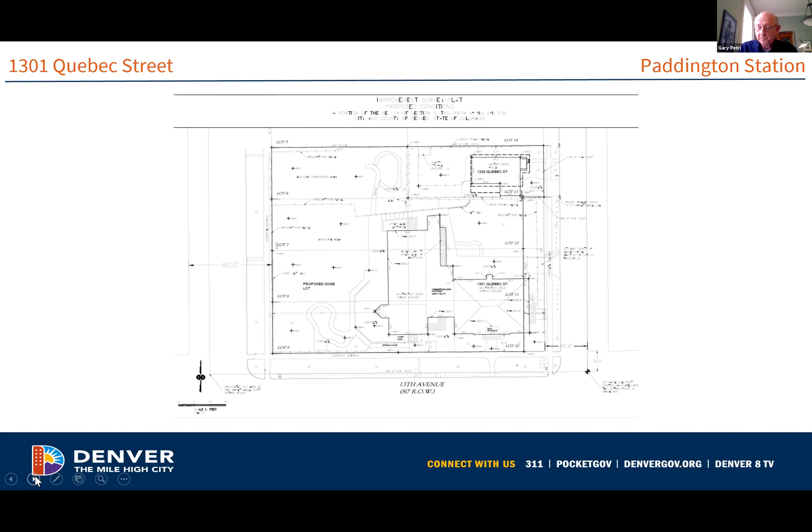Brad: aye. Graham: aye. Julie: aye. Gary: aye. Anne: aye. Kelly: aye. We have a unanimous vote and the motion passes.

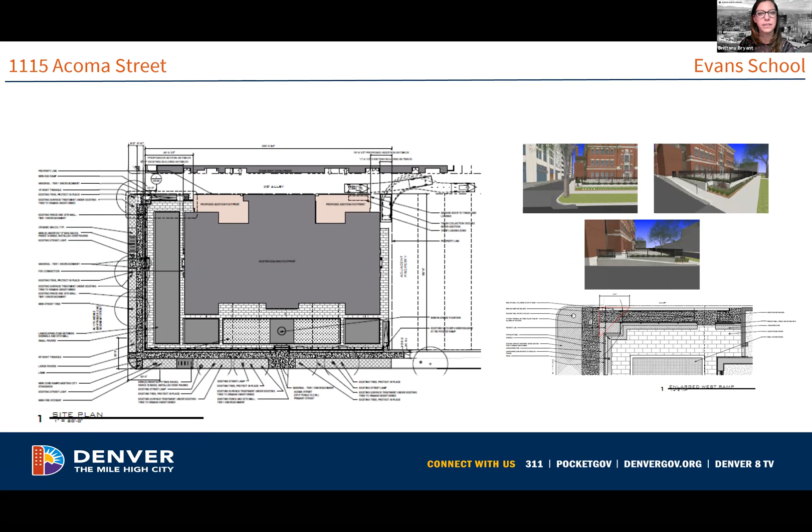Additional details will be provided in phase 2, but the applicant wanted initial feedback on alterations to these podiums, as landmark staff feel that since this building is part of the City Beautiful movement, preserving that podium and the views of the Evans School is a significant element of the design. However, we do not have concerns over the sight triangle or the ADA ramp being added in the rear, as you can see in this image.

Moving on to the first floor plan, you can see the placement of that addition. In addition, the applicant is proposing some new entries into the Evans School on the north and south elevations, as well as the primary elevation onto Acoma Street. The reason for these new entrances is because the space is going to be divided up on the ground floor to be activated for the public.

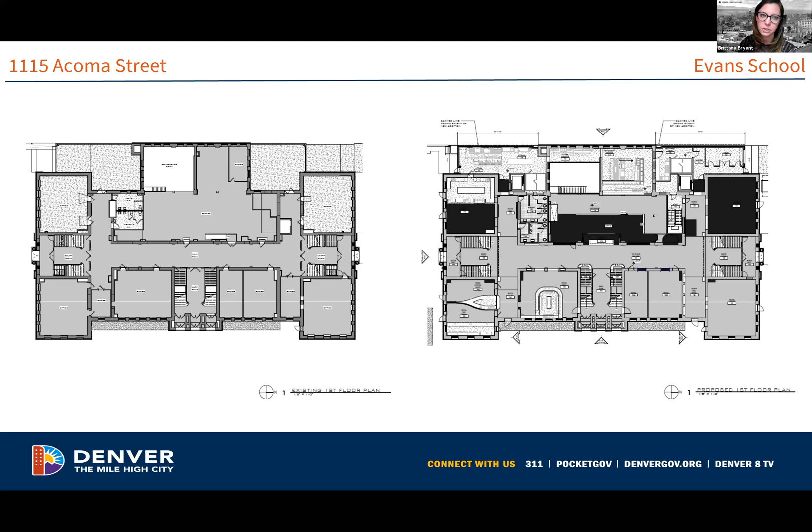Along the south elevation, there will be 2 new entrances proposed for spaces at the front and rear of the building, as these are separate spaces requiring separate entrances. Along the north, there will be 2 new entrances in total. On the primary elevation, there will also be some new entrances, but that's better shown in the elevation, so we'll move on.

This is the existing second floor plan. The existing second floor has a historic auditorium space that will be retained, and again that new proposed 2-story addition at the rear, occupying that mechanical space.

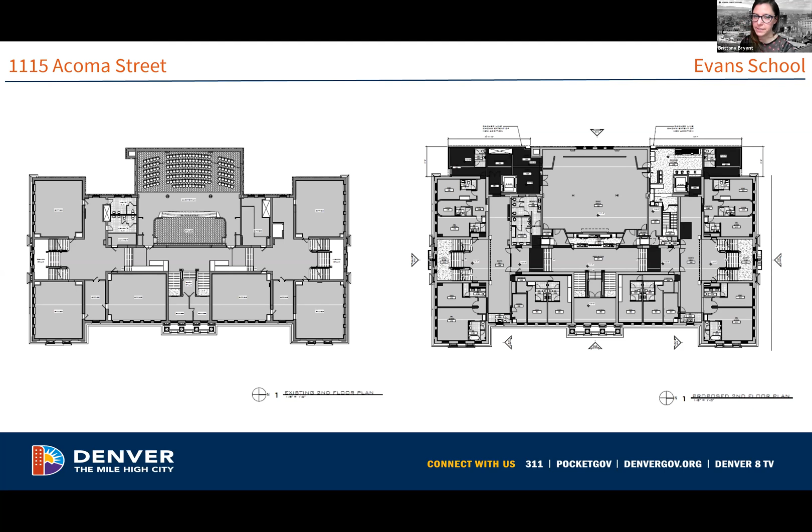The applicant is also proposing to open up blind windows on the primary elevation, because the space is being divided up into new uses that will need these new openings, as you can see on the floor plan. Historically, behind those blind openings was the chalkboard space, but now they will be smaller spaces above which require new openings.

On the 3rd floor, historically on the roof of the theater, there was a gymnasium space used by the Evans School. The applicant is proposing to keep that 3rd floor gymnasium space open, as shown in this proposal, and will maintain the historic fencing on the 3rd floor of the gymnasium space, which will be behind a new screen wall for the proposed activated use on the roof of the theater space. Right now the applicant is showing it as possibly a pool space, but it is intended to be open space.

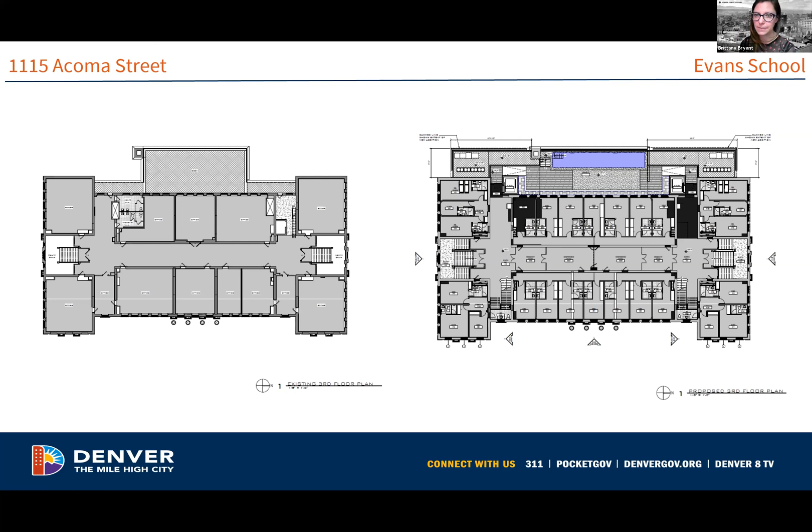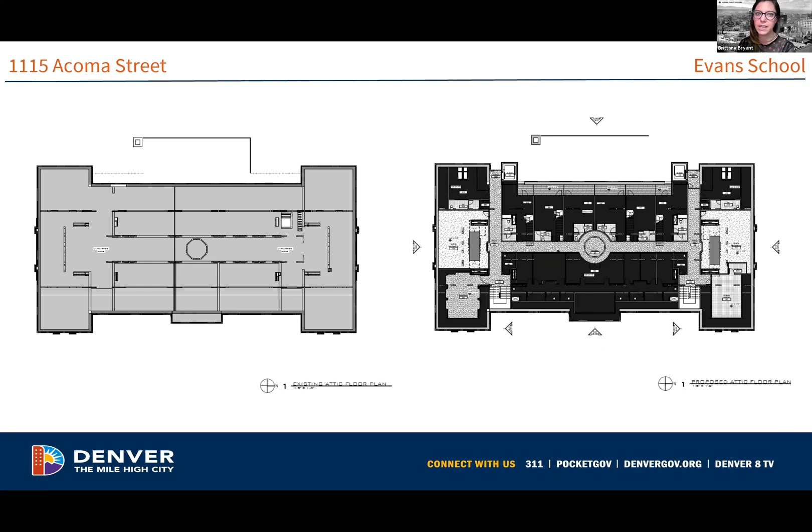At the attic, the applicant is also proposing to activate the attic space. The applicant is proposing a new set of clerestory windows at the rear of the building that will allow additional light into the attic space without having to alter the front primary facade or the wings on the south and north of the Evans building. This will also have a terrace, which you can see on this attic floor plan.

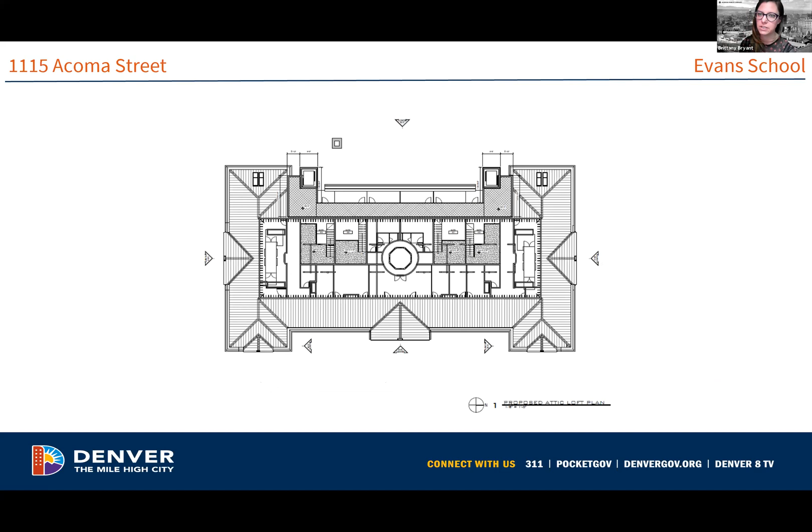Here in the next plan, you can see that proposed clerestory structure. This is separate from the addition that is two stories in height; this is just a new clerestory attic window structure that is proposed, which will include demolition of the roof structure.

13.6% of the roof is proposed for demolition, including two historic chimneys on the primary slope and the north slope. These chimneys are not highly visible from the public right-of-way and aren't significant character-defining features of the building, so staff weren't concerned about their demolition. The roof demolition is located at the rear, totaling only 13.6%, and it's to accommodate a new clerestory to allow for activation of the attic space.

It will also include two skylights, which you can see in plan here on the roof at the rear of the structure along the alley.

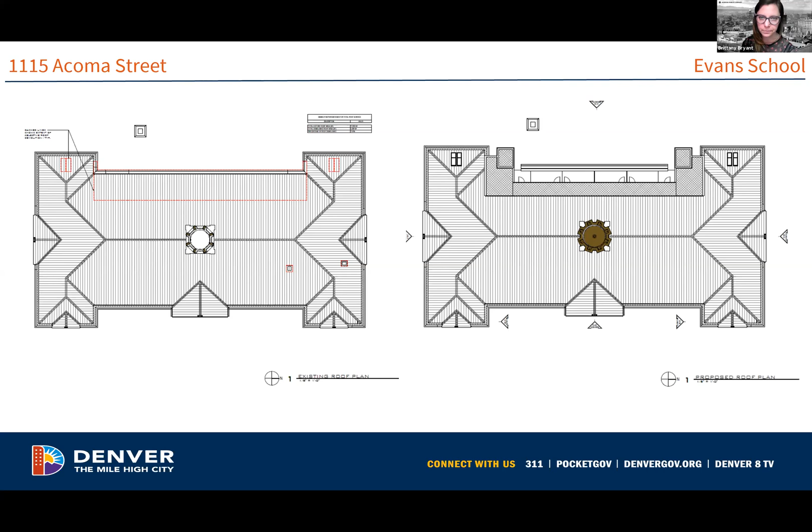These openings will be in the blind window locations, and the applicant is proposing to preserve the decorative brickwork in these openings. However, Landmark staff feel that could be shown a little better in the application materials just to confirm that it will be preserved.

Two new door openings are proposed on the front facade as well, visible at the ground floor. An additional opening is proposed on the south wing's north elevation, shown in a different slide, also on the front facade, intended to mimic the north elevation's historic maintenance entry opening located on the north wing's south elevation, as those two wings project slightly.

Here you can see the chimneys proposed for demolition. Again, these are not very visible from the public right-of-way, so we didn't have concern over their demolition. Here you can see how these alterations will affect the front facade of the building.

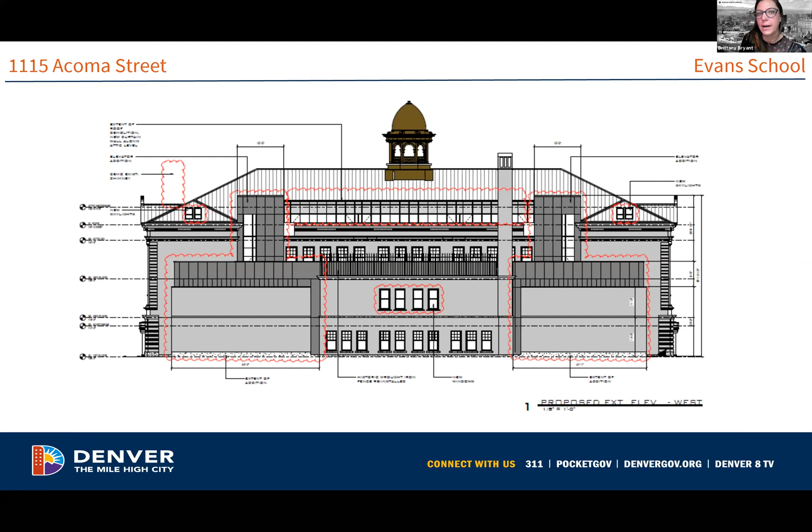Minimal demolition on the rear of the building to allow connection to the primary structure. This is also showing the south elevation — the north elevation of the south wing wall, which will be demolished to accommodate a new door. This is intended to match the historic maintenance entry on the north wing of the structure.

So that will be a new door that is introduced onto the primary facade. Landmark staff didn't have a lot of concern about this opening, as it is on a kind of interior facade that is on the primary facade, but we feel like it's pretty compatible.

We do have some concerns about the new entrances introduced on all of the elevations that are primary, including the south and primary elevation, as our guidelines do talk about not enlarging openings to do that. However, we feel the way the applicant has gone about this is very compatible, and will reactivate the Evans School, which has been underutilized for several years.

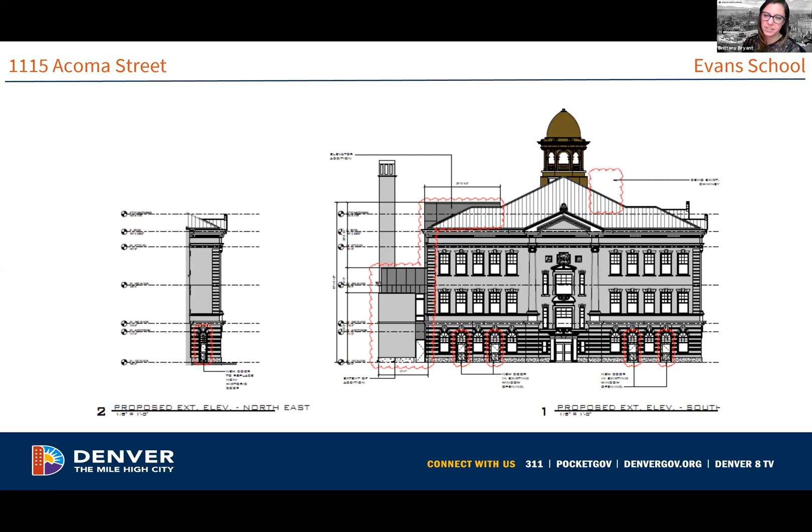Similar to the north elevation, same design for the doors. So I'll just move along there.

So here are some renderings of the proposed project. You can see that much of the site has been converted into hardscaping, with just a little bit of lawn preserved at the front of the building. We are not very concerned about the site being converted into hardscape elements.

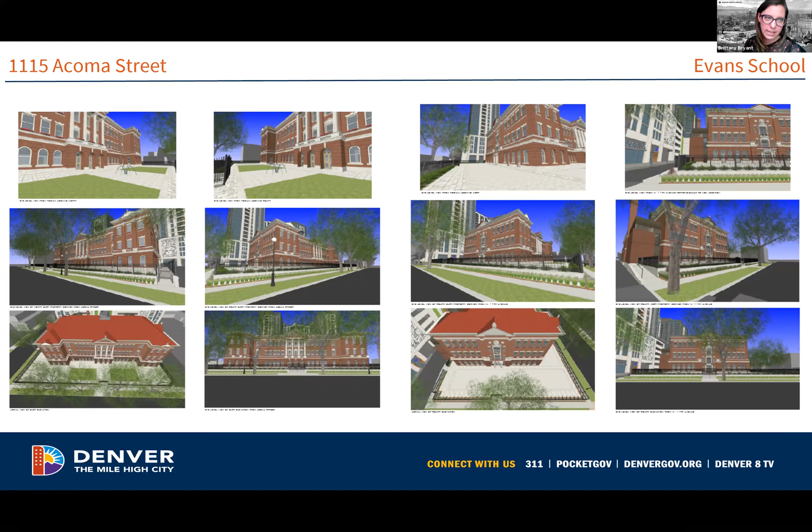However, we are concerned about what that entails with additional pergola structures or umbrellas or things like that. So we do want to be cognizant of what the site alterations are proposed, because we feel strongly that maintaining views into this building is very significant and very much a part of its city beautiful character. That is just something to keep in mind as the commission is reviewing this application.

And here is a rendering of the proposed rear addition. You can again see that is 2 stories in height, with those taller elevator towers, and then that clerestory window that will be in the attic of the structure.

Generally speaking, we are recommending approval of this application, as we feel that the phase 1 mass, form, and context is compatible with the Evans School historic character defining features and the surrounding historic context.

There are a few things we would like to be shown a little bit better in the phase 2 details, such as how those brick detailing will be preserved around the front elevation, but we didn't make that a condition, as that can be clarified easily in the phase 2 submittal. And again, while our guidelines do not recommend new openings on primary facades, we feel that the applicant has done it in a very compatible way and in a way that will reactivate the Evans School.

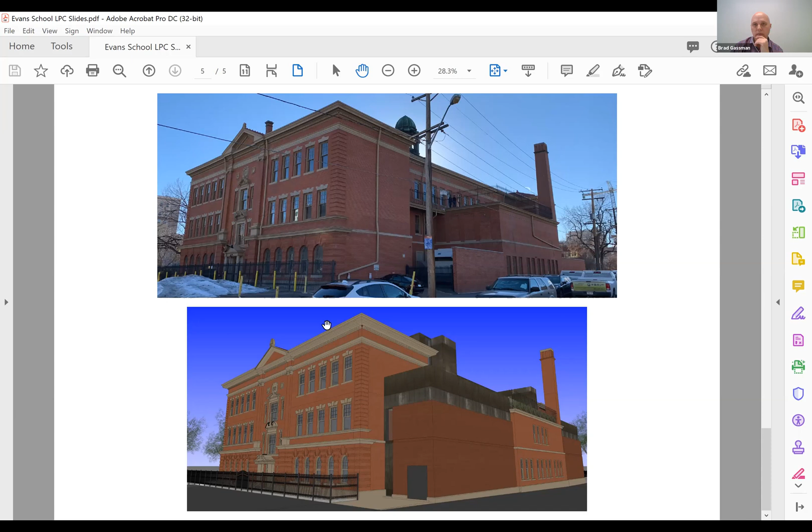This is Brad. I just want to make sure I'm completely understanding a couple of the areas. On the back side, the clerestory section, it looks like it's bookended between the two vertical elements where the elevators are, and then that's a little flat roof section that just carves into it. It's not the roof coming down to be a little flat roof section that's just framed by the two vertical elements.

Yeah, I'll try to explain that. The two elevator shafts are bookending that modification. What we're doing is removing a section of roof back up the slope, then inserting a vertical curtain wall, that clerestory that Brittany described, and a horizontal deck surface. So we're removing a triangle, in section, of that roof, so that it becomes a negative into the building rather than an added dormer or structure. We're carving in to create that vertical plane of light and access to views from that attic roof.

Great, thank you. Any other questions? No? All right, thank you so much for your time.

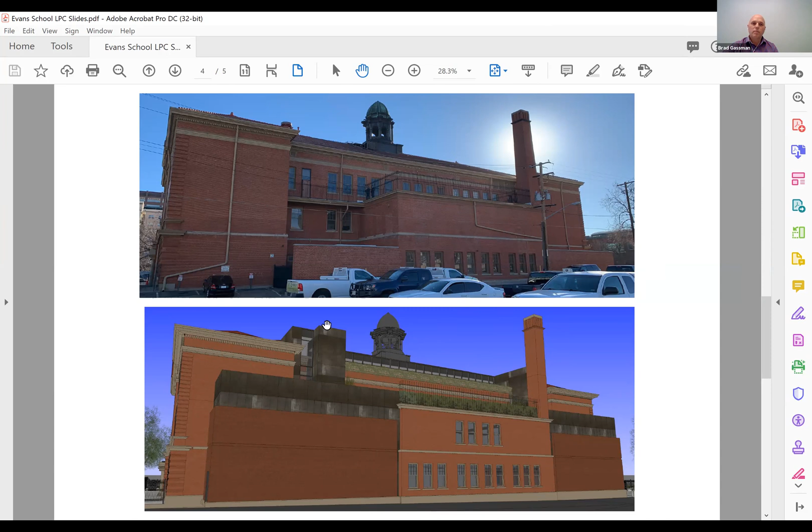And there is something already going on there, so as long as they're developed in a way that you understand that -- I think the blind windows on the second, third, and fourth floor that were added were a little different than the rest of the windows throughout the building, so that's a good indication that something is there that's a little different. That feels really appropriate. If that same level of thought is brought to the other openings as well, that can be successful. The building is going to read all the wonderful historic elements, and you're always going to know that something else is going on there, so it's not trying to mimic history, essentially. I think they've done a really nice job, and I'm supportive of the project.

Great, thanks. I agree with what you said. I'm really excited to see this building activated again, and I think the addition is definitely subordinate. I agree with your assessment on the new openings -- it's not like they're damaging any character defining elements. They're maintaining the historic patterns, rhythm, and proportions with the new opening locations. So in that way, they were very sensitive to the existing building. I personally felt that met our guidelines and allows for that continued use, so I found that to be appropriate as well.

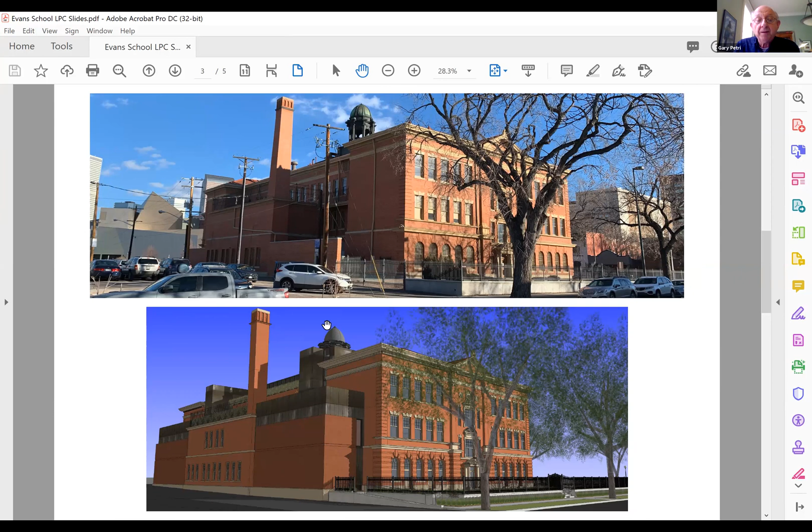Yeah, Gary. I agree with Anne's concern. The number of openings being altered is potentially a concern, but the ones I'm most concerned about are the two new door openings where there was no opening before. The detailing of that is going to be critical - that it be compatible, but also not mistaken as original openings. So how that subtlety is managed in the detail application is going to be pretty important for me.

I'm also a little concerned about the alterations to the podium, and I'm wondering about the reduction in the area of turf. I'm wondering if some of the areas proposed for pavers could address that concern by using a turf paver rather than a solid paver. But we really need to look at it in the detailed submission to see how the podium is treated so that it's sensitive to the building's original setting. I'm not opposed to converting turf to pavers, but it needs to be done in a very sensitive manner, and the reduction of turf is a little bit of a concern to me.

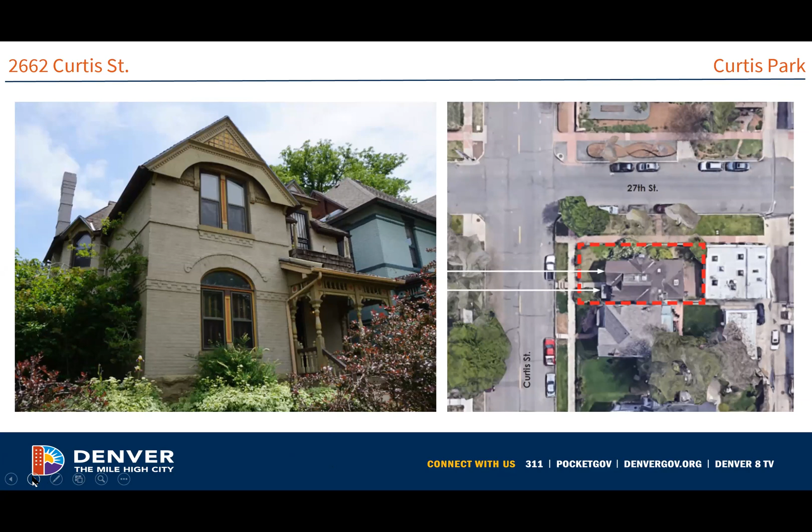Jen? Yeah, weird. I don't know why it's doing that. There you go. I'm trying to move the mouse too. So there you go, should be able to click that little button. There you go, okay great.

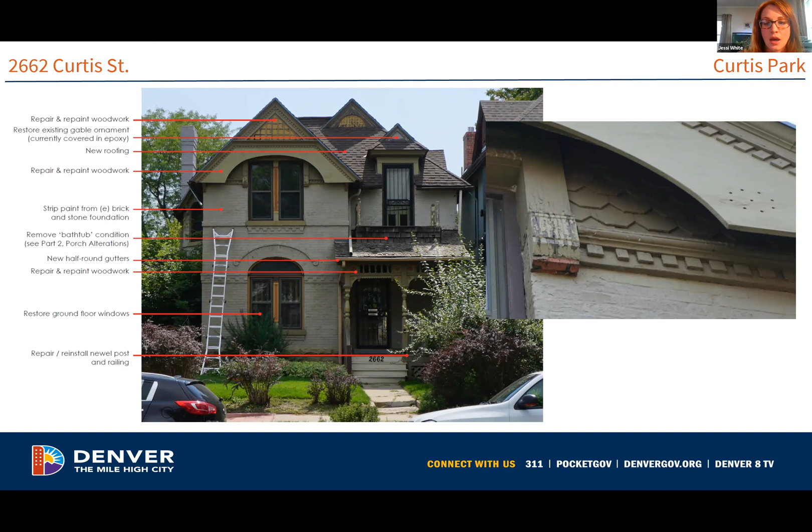Moving on. The applicant is requesting to strip the paint off the existing historic brick cladding and stone foundation. In addition to removing the paint, the applicant is proposing to restore the woodwork on the gable ends of the house, as well as the ground floor windows. Staff would like to note that Landmark does not typically review restoration work, but wanted to note this as it is included in their application and wanted you guys to have eyes on it.

The applicant is proposing to repair and alter the front two-story porch. They will repair and reinstall a missing railing and install a new newel post to match the existing newel post at the first floor level. Here you can see the existing first floor level of that porch, the missing newel post, the railing that will be reinstalled, and the existing newel post that will be matched on the other side of the porch.

At the second floor level, the applicant is requesting to remove a non-historic second floor porch and construct a new second floor level on the existing porch. The current second floor level measures 3 foot 8 3/8 inches by 7 foot 10 1/4 inch. It was designed so that it does not drain properly, and it's caused severe moisture damage and rot over time. The applicant is proposing to remove the non-historic second floor porch and construct a new porch in its place.

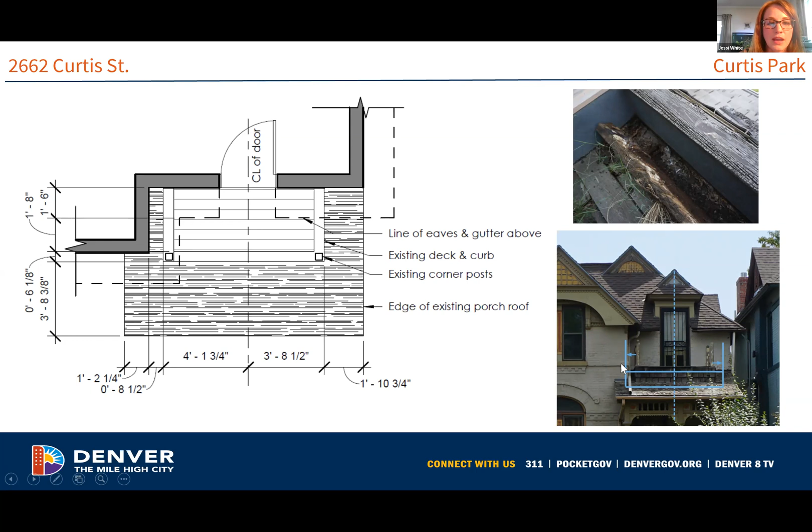Here you can see what they call the bathtub effect, where water just collects and has rotted out the floor. You can also see the outlines for the proposed porch on the house.

The new porch will measure 6 feet 3 7/8 inch by 10 feet 1/4 inch, and will be centered on the existing upper story door. There are existing ghosting marks and nail heads that provide clear indication of what the historic porch footprint looked like, showing that it did not bump out past the gable front bump out at the front of the house.

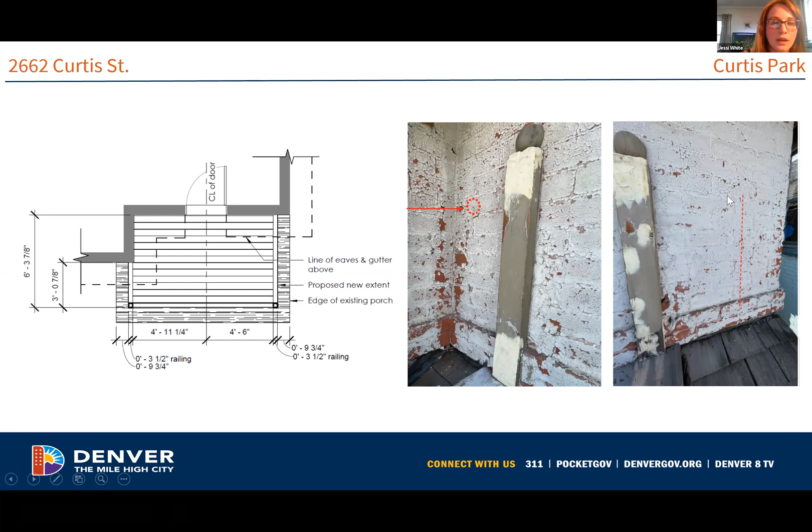You can see here, circled in red in the left photograph, a nail head, and then a line on the other side where the porch originally sat. In addition to the ghosting marks, Sanborn maps show that the historic footprint of the front porch did not extend past the gable front bump out, but really just sat right in that bump out area, or recessed area, and aligned with the bump out.

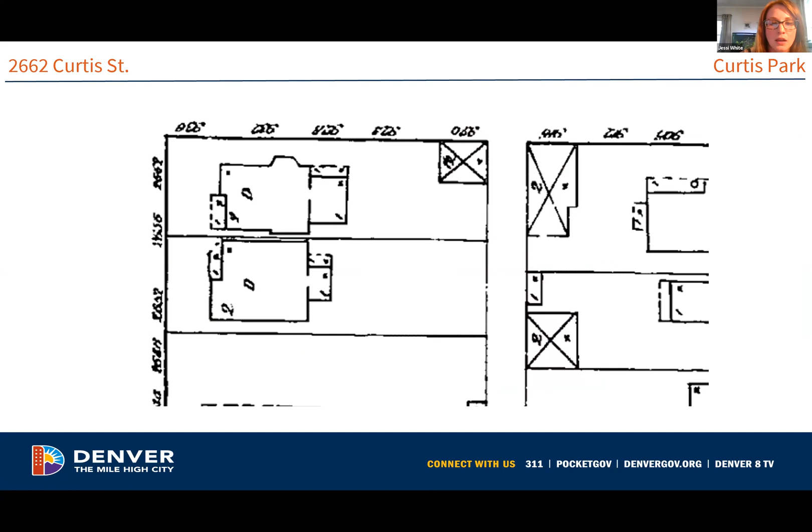A new 36-inch high guardrail will be installed, reusing existing balusters, adding a bullseye block at the band at the base of the rail, and space between the rail and the porch floor to allow for drainage, so we don't get that bathtub effect again.

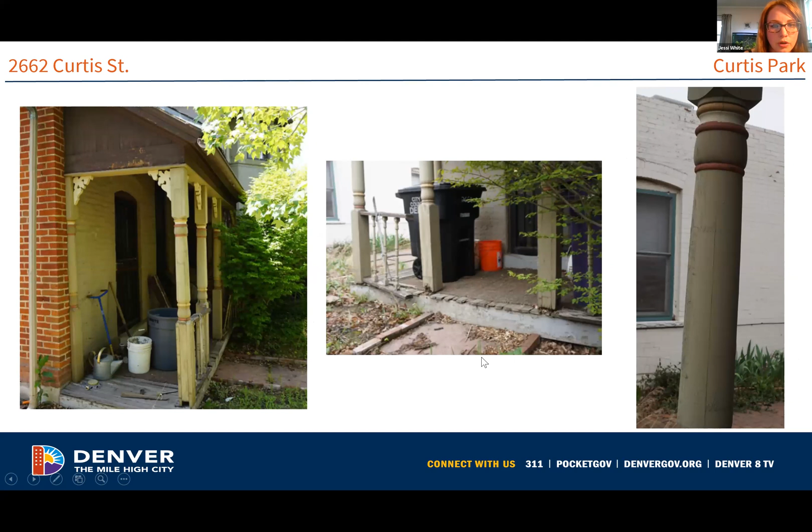So pictured here is the existing side porch conditions. Currently, this porch is sitting on grade, so it's rotted over time. Some of the balusters are deteriorated, and the base of the columns are deteriorated.

The applicant will be repairing the porch on the northeast side of the house. The existing rotted porch floor will be replaced with a concrete foundation, 2x4 treated sleepers, and a tongue and groove pressure treated wood floor to match the existing. The applicant will be maintaining the existing porch roof and scrolled brackets, but will be installing new turned wood columns to closely match the existing columns on the house.

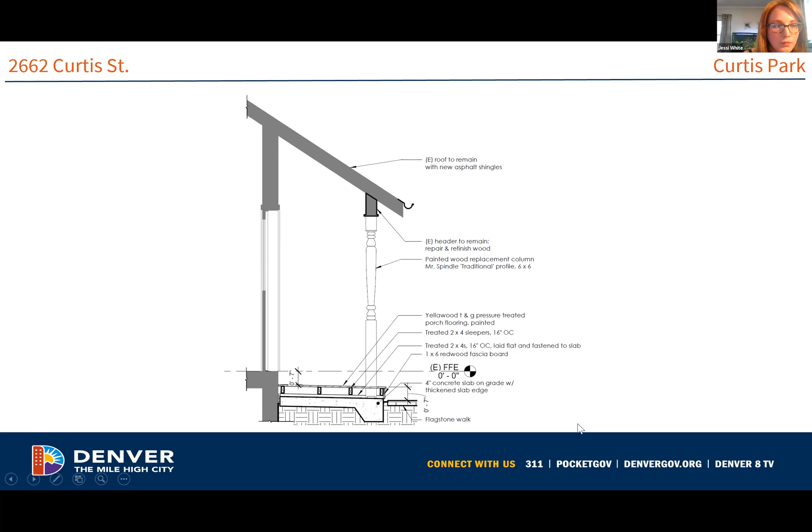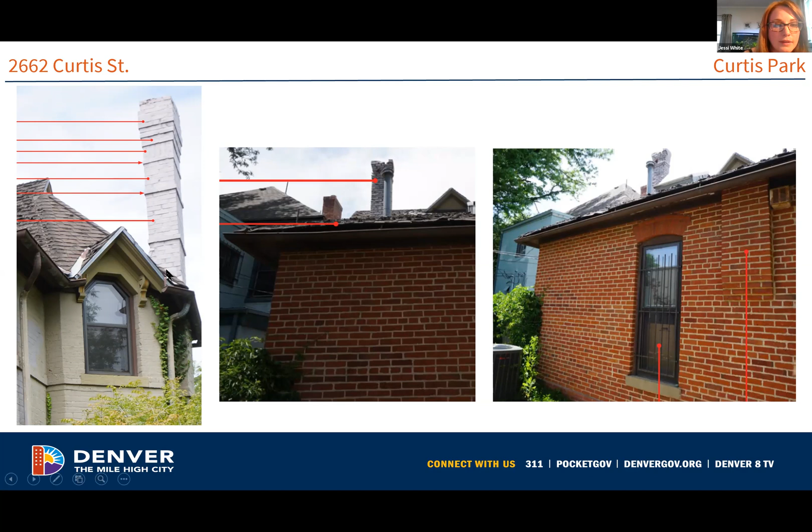The applicant is requesting to reconstruct those chimneys. They will be basing the design of the chimney on the 1-story portion of the house on the less high style chimney on the back of the 2-story portion of the house.

And then finally, the applicant did outline that they would be replacing the roof. They have not determined which roof color they will be going with. Staff would like to note that this can go through our quick permit process, which is an administrative review. Once they have made the determination for a final color, we can do that review, but we wanted to note it here in this presentation as they included it in their application.

So staff is recommending approval with conditions of this application, with the condition that the proposed 2-story porch fit within the ghosting marks of the historic porch, not extending past the gable front bump out. This is per guidelines 2.13 and 2.35.

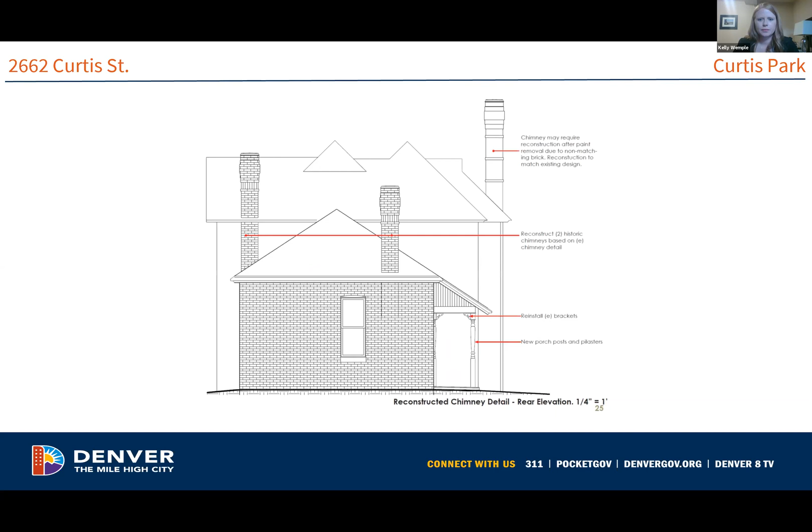Hi, Keith Pryor, 2418 Champa Street, Curtis Park Design Review Chair. We did work with the applicant. We have submitted a letter of support on this restoration of this porch and the alterations. On the second story, it is very apparent and also very common for porches that do have a second story for them to go beyond the bump out gable from front to back. And I agree with the architect, and we are supportive of the front to back going beyond the bump out of the bay, and that the width itself be in line with the bay. That is what is typical and what is found on the other houses shown in their application. We are very much in support of it going front to back and enlarging the area on the second level. Staff has approved, and the commission has approved, new construction recently with other types of porches like this, with the second story and having that seating area above. It is very typical and common of the district, and it would be a wonderful restoration of this porch as to what it was, as we see with others in the district. So we are in support of this. Thank you so much for your consideration.

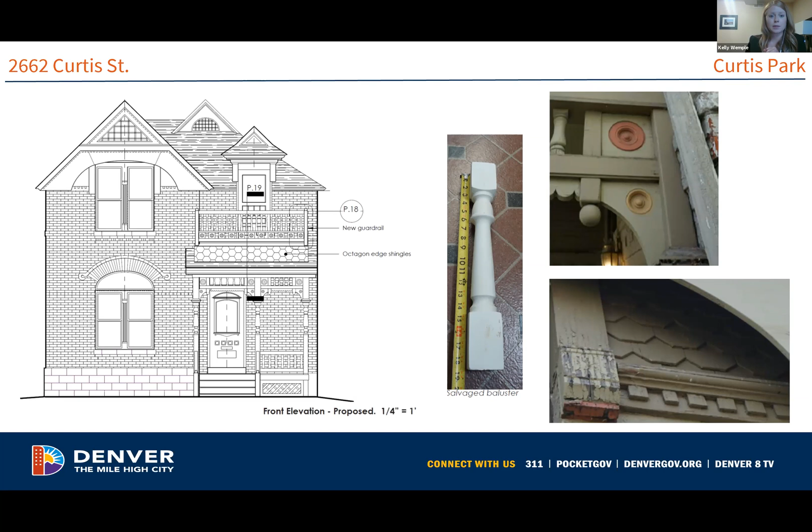I second. Thanks, Brad. I will call for the vote. Brad, aye. Graham, aye. Julie, aye. Gary, aye. Anne, aye. Kelly, aye. All right, so we have a unanimous vote and the motion passes. So the project is conditionally approved.

Next on our design review agenda today is project number 2021-COA-203 at 2631 Curtis Street. So Abby, go ahead and start. Hey, good afternoon, so yes, we have 2631 Curtis. This is a brick Italianate residence constructed circa 1886. It's the red brick residence you see in the middle of the photograph. The applicant is proposing to construct a second-story addition on top of an existing rear one-story addition. Sanborn maps indicate that the rear addition was constructed by 1893.

So here are some illustrations of the project. You can see that the addition will be located completely to the rear of the existing structure, so there's not going to be any visibility looking straight on. It's tucked behind. The existing single-story rear addition is irregular in form and doesn't extend the entire width of the original residence. The new addition will be regular in form and will project over the one-story addition, extending about 5 feet beyond it to the rear. The new addition will then be supported by timber posts where it projects over the existing.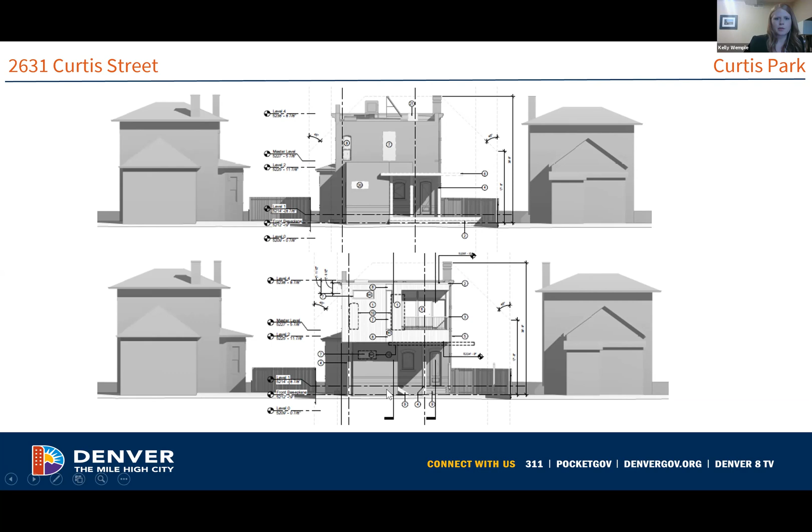Hey guys, thanks for fitting us in today. My name is Derek Soule, I'm an architect at West Standard. I've been working with Carrie and Mark, the owners of the property, for about a year. I know them through my kid, they've been going to school together for the past several years, so I'm helping them out with this effort here.

So they have this awesome Victorian or Italianate house from the Victorian era, and they need to expand to meet their modern lifestyle. They're proposing a new primary bedroom, bathroom, and closet on the rear of the property so they can store their clothes, work from home, and provide their kids with separate rooms on the second level.

It's a very client-driven design, they have a very modern palette they like, so I just tried to follow their lead with that. And like Abigail mentioned, we did have another iteration of this design that had a section projecting out the side and was somewhat visible from the street.

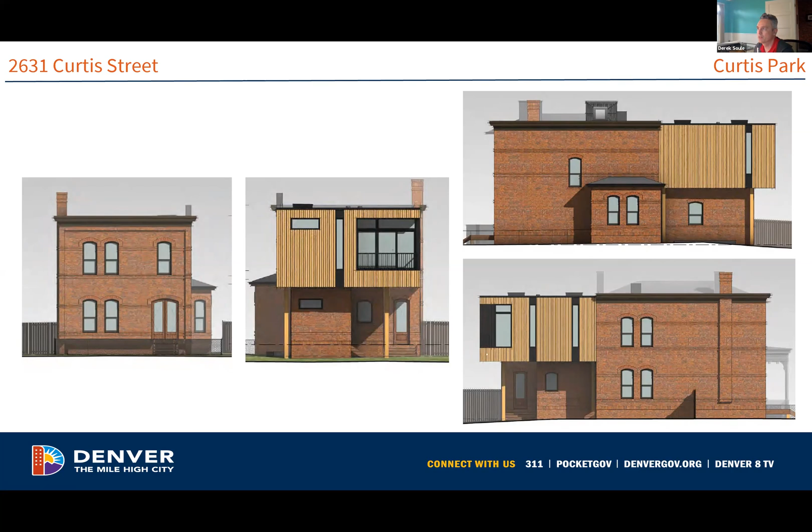I'm looking at your rendering, what we're seeing is 8 inches. Is that correct? Yeah, I can get you a better dimension here if I open the drawings.

Sorry. While we're waiting for that, are there any other questions?

I can share my screen if I need to. Oh, it's not - yeah, unfortunately you can't share the screen. If you look at page 8 of the drawings, it gives somewhat of a close-up that you can see a little bit more. Page 8 of the drawings, because I have the drawings, okay.

Page 8, yeah. I got 6 inches from the top of the cornice to the top of that. It's not really a parapet, but it'd be like gravel stop flashing with our roof assembly.

And then one other, can I just ask you one other question - that's great - about how deep is the existing cornice? Just give me a guess. Shoot, how am I showing it here? It's about 2 feet, I'd say 2 feet to 30 inches.

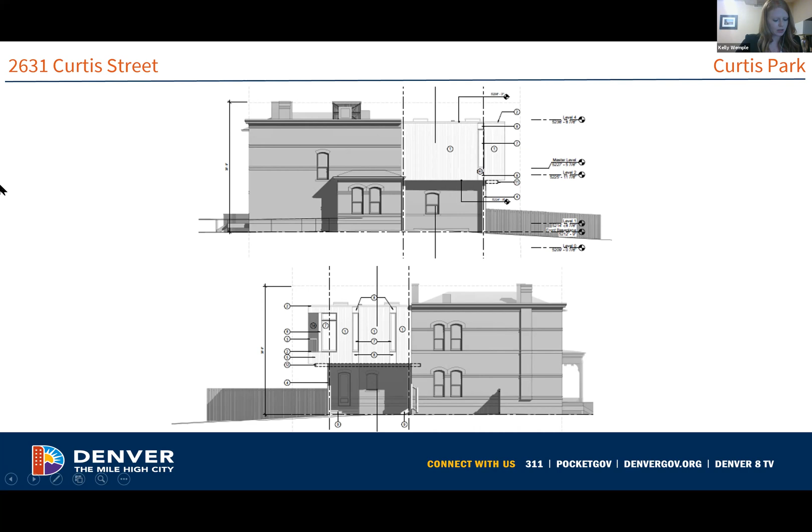All right, we have one more project on our design review agenda today. It's project number 2021-LM Demo-213. It's actually two project numbers, also 2021-ZLAM-090, and it's for 2845 West 36th Avenue.

Jesse, go ahead and start your presentation. Thank you. This is 2845 West 36th Avenue, constructed in 1953, a non-contributing building to the Potter Highlands Historic District. The applicant is requesting to demolish the existing non-contributing structure to make way for 2 new infill projects that will be reviewed by the LPC through the 2-step infill process at a later date. Staff would like to note that demolition cannot be finalized until a replacement plan is approved by the commission. This will be a proposal for conditional approval.

And change the slide. Jen, oh, there it goes. Okay, just a little sleepy today.

In addition to demolishing the existing structure, the applicant is requesting to split the lot into 2 zone lots. The existing lot is 50 feet wide and 125 feet deep. Each new zone lot will be 25 feet wide and 125 feet deep, fitting the typical zone lot sizes for this historic district. The property is non-contributing and can be demolished; however, a replacement plan must be approved prior to demolition per guidelines 2.55 and 30-66 of the Denver Revised Municipal Code. The proposed zone lots fit the typical zone lot sizes in the historic district, meeting 30-65.5 of the Denver Revised Municipal Code. Staff is recommending conditional approval with the condition that a replacement plan be approved prior to demolition per design guidelines 2.55 and chapter 30-66 of the Denver Revised Municipal Code. All right, thank you. Any questions for staff?